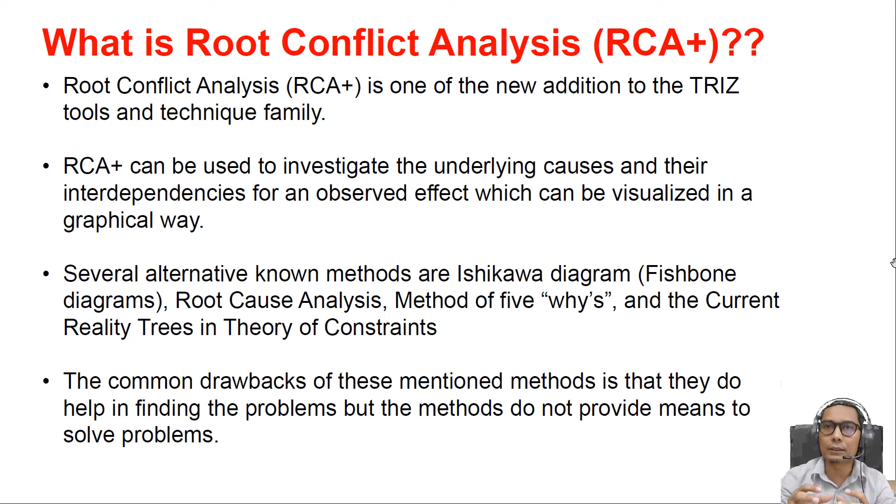So RCA plus akan provide means ataupun membantu kita untuk menyelesaikan masalah kita dengan solution-solution yang di-trigger daripada contradiction matrix dan 40 inventive principles. Okay. And then RCA plus was developed based on 3 methodologies, which are the cause-effect chains, the theory of constraints, and the TRIZ itself. So the modeling of the RCA plus is performed within the scope of 3 tasks. Okay, macam mana kita modelkan RCA plus ni adalah bergantung kepada 3 perkara.

Satu, to solve a particular problem related to an individual specific product, service or process. Second, to solve a broad problem related to a whole class of products, process or service. And third, lastly, is to predict and eliminate possible failures within the system and processes. Okay. Principle of this method is to map all causal chains of causes and effects devoted to a problem, which is represented as a general negative effect. So dia akan mapkan segala faktor-faktor yang berkaitan yang menyebabkan masalah itu berlaku dan effects dia.

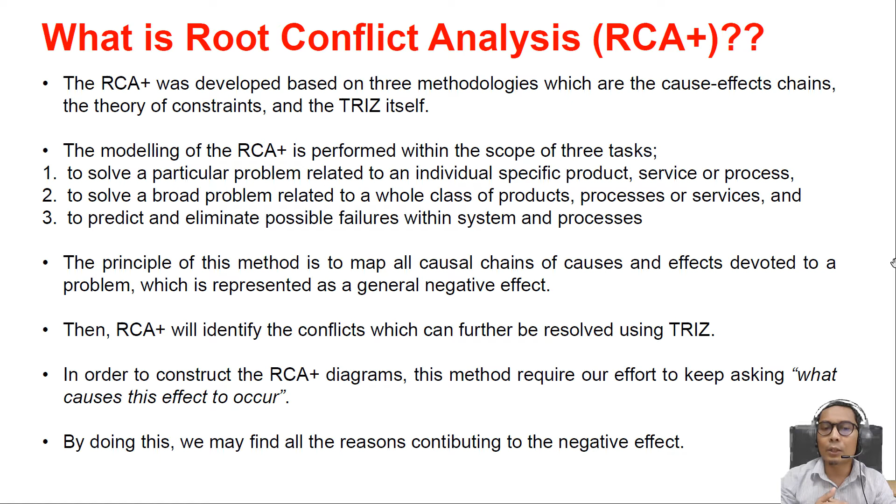Okay, and then the RCA plus will identify the conflicts which can further be resolved using TRIZ. Okay, daripada diagram RCA plus tu kita akan nampak mana technical contradiction yang berlaku. Dan in order to construct the RCA plus diagram, this method requires our effort. So untuk kita develop, construct the RCA plus diagram ni, kita kena sentiasa bertanya, what causes this effect to occur? What causes this effect to occur? Sentiasa tanya. So by doing this, we may find all the reasons contributing to the negative effect.

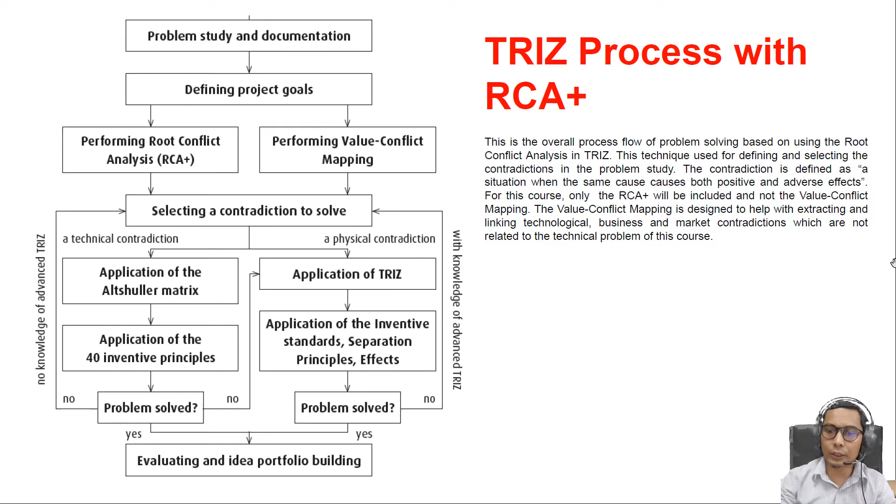Okay, so seperti yang saya explain sebelum ni, RCA plus will be included, and the value conflict mapping kita tak akan cover lah. Okay, untuk subjek ini. Okay, right. So to identify and select the contradictions, RCA plus is divided into two flows seperti yang awak nampak tadi.

The first flow is on the application of the basic TRIZ tools, and the second flow is on the advanced TRIZ, which kita tak cover lah. Okay, an engineering contradiction is a condition in which an attempt to improve one parameter of a system leads to worsening impairment of another parameter. So maksud dia, bila kita improve satu parameter, ada parameter lain yang berubah dan jadi lagi teruk. Tu maksudnya berlaku engineering contradiction lah.

Contoh macam kita ubah suhu, tiba-tiba speed dia jadi teruk. Macam tu lah. Okay. So it can be reflected in a positive and negative interaction between two or more components. And by using the contradiction matrix, we can see which of the 40 inventive principles are relevant to our problem. Nanti awak akan tengok apa itu contradiction matrix, apa itu 40 inventive principles.

So 40 inventive principles adalah basic generalized rule that is accepted as facts, works in the same way consistently and usually followed as a basis of reasoning or explanation of the invention. Okay, macam mana dia dapat 40 inventive principles ni? Henry Altshuller, dia dah screen 200,000 patents to find out what kind of contradiction were resolved by each invention and the way it was achieved. And then daripada 200,000 tu, he synthesized down to 40,000 patents, and then he developed a set of the 40 inventive principles.

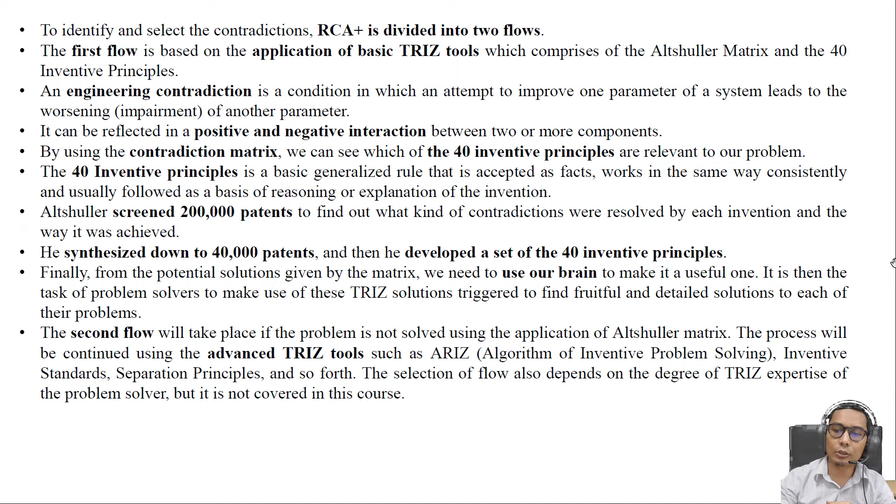So it is then the task of problem solvers to make use of these TRIZ solutions triggered to find fruitful and detailed solution for each of their problems. Okay. So the second flow macam saya terangkan tadi, dia adalah advanced TRIZ tools, tapi kita tidak cover dalam subjek ni. Okay, macam mana kita nak membina RCA plus TRIZ ataupun RCA plus diagram.

Okay, kalau kita tengok contoh kat sini, the simplest causal chain can look as follows. Kalau you tengok yang atas sekali tu adalah dia punya main problem, which is the computer crashes from overheating. Macam saya tanya tadi, kita kena keep asking what caused this to happen, why this happen. So dia tanya pula what caused PC to crash. Benda yang menyebabkan PC crash adalah microprocessor stops functioning. Tengok bila microprocessor stops functioning, the effect is computer crashes from overheating. Dan dia tanya lagi, what causes the microprocessor to stop functioning? Chip's temperature is too high.

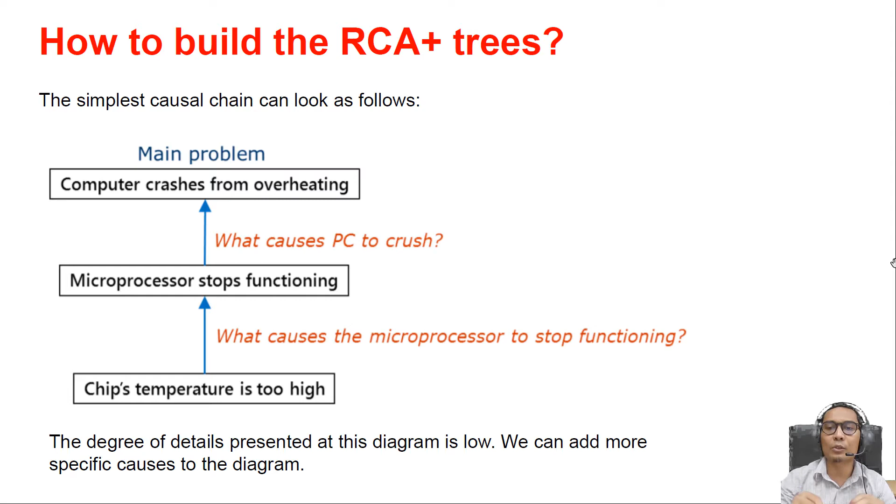Okay, so dia berkait kalau tengok daripada ni salah satu ni lah. Tapi untuk contoh ni, the degree of details presented at this diagram is low. So we can add more specific causes to the diagram. Kita tengok contoh yang seterusnya. So RCA Plus ni dia ada number of rules and checklists to perform in-depth and in-breadth analysis of a problem. So the following diagram attempts to reveal several possible causes for overheating of the chip. To avoid complexity, we omit other causes that contribute to the problem. Kalau awak tengok dari sini, dia kembangkan lagi daripada tiga yang pertama tadi.

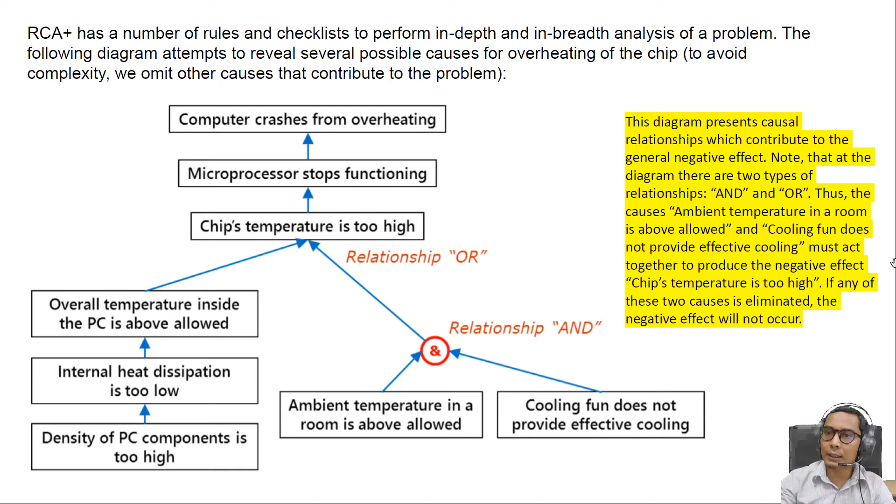Okay, so thus the causes, the ambient temperature in a room is above allowed, and cooling fan does not provide effective cooling, must act together to produce the negative effect, which is the chip's temperature is too high. So if any of these two causes is eliminated, the negative effect will not occur. Itu maksud dia.

Okay. So macam mana pula kita nak map the contradictions? How to map the contradictions? Technical and physical contradictions can be formulated on the basis of evaluating the cause-effect diagram against the positive effects which are provided by cause of negative effects.

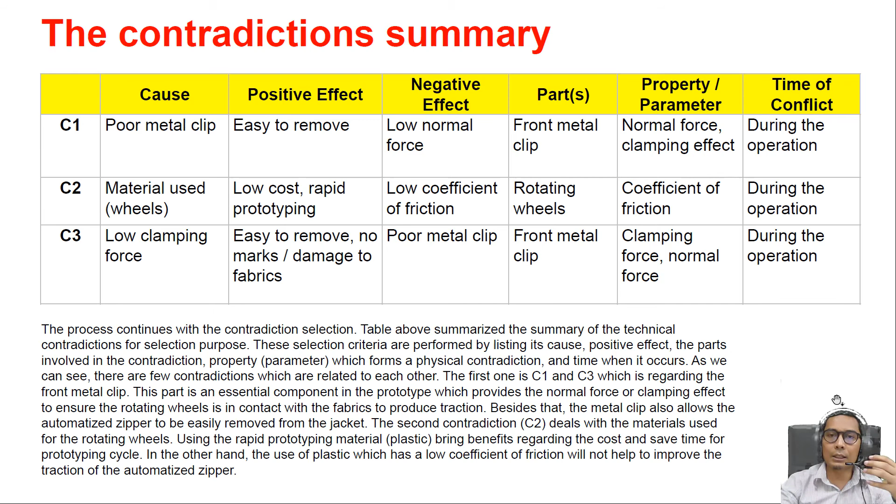So the second contradiction, C2, deals with the materials used for the rotating wheels. So using the rapid prototyping material, plastics, they bring benefits regarding the cost and save time for the prototyping cycle. But on the other hand, the use of the plastic which has a low coefficient of friction will not help to improve the traction. So itu adalah contradiction yang berlaku. Walaupun material tu bagus untuk rapid prototyping dan cepat, tapi dia tidak membantu untuk improve traction.

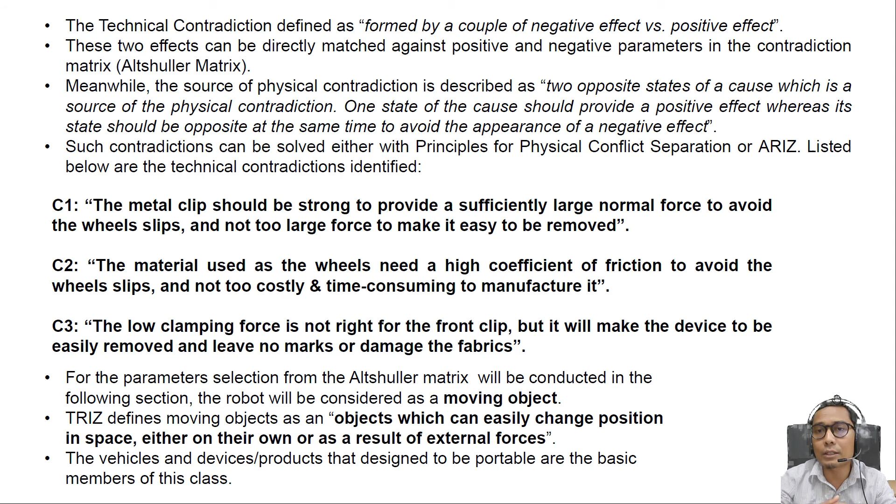Okay, so the technical contradiction is defined as formed by a couple of negative effects versus positive effects. So these two effects can be directly matched against positive and negative parameters in the contradiction matrix, which is the Altshuller matrix. So meanwhile, the source of physical contradiction is described as two opposite states of a cause, which is a source of the physical contradiction. So such contradiction can be solved either with the principle for physical conflict separation or ARIZ.

Okay, so tadi kita dah dapat 3. So kita listkan ketiga contradiction tadi. Yang pertama, the metal clip should be strong to provide sufficiently large normal force to avoid the wheel slips and not too large force to make it easy to be removed. Second, the material used as the wheels need a high coefficient of friction to avoid the wheel slip and not too costly and time consuming to manufacture it.

Yang ketiga, the low clamping force is not right for the front clip, but it will make the device to be easily removed and leave no marks or damage the fabrics. Okay, so for the parameter selection untuk case yang ini, kita akan consider robot ini sebagai moving object. So moving object adalah object which can easily change position in space either on their own or as a result of external forces. So the vehicles and devices or products that are designed to be portable are the basic members of this class, right?